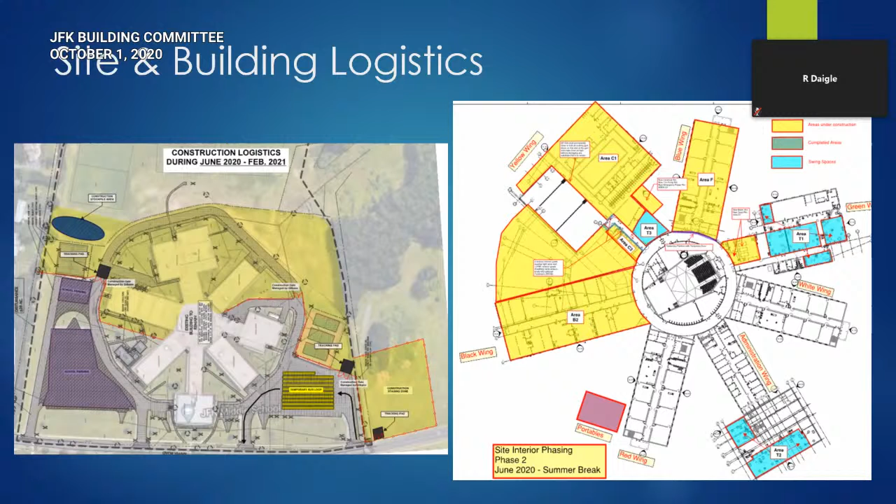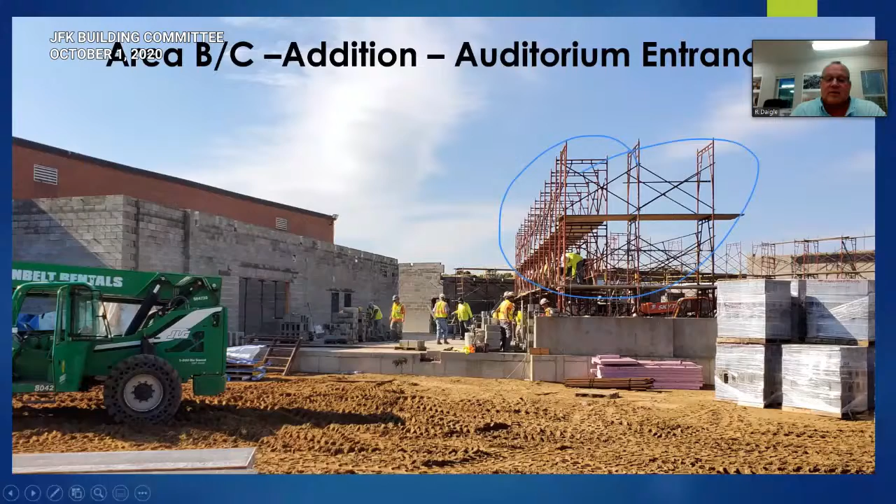Randy, you got to unmute. Or maybe Walter can hear. No, nobody can hear you. They're saying no sound. Now we can hear you. Talk now, see if we can. You hear me now? Yes, sir. Yeah, okay. Should be good.

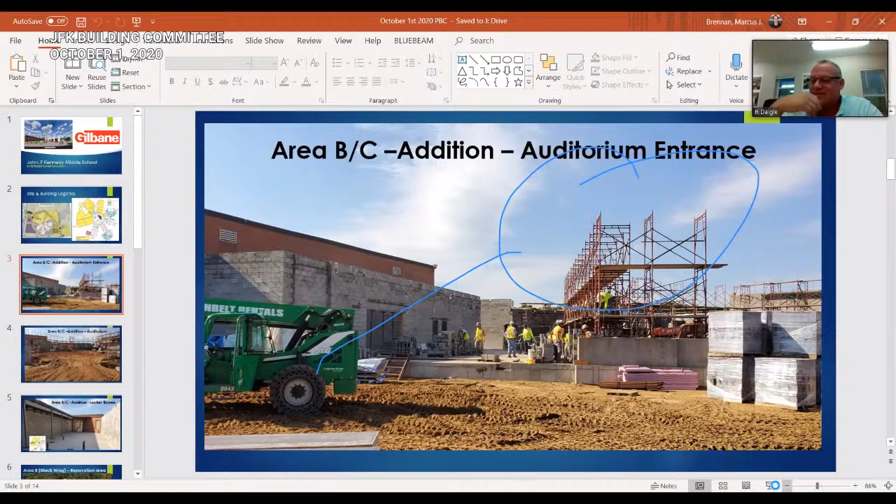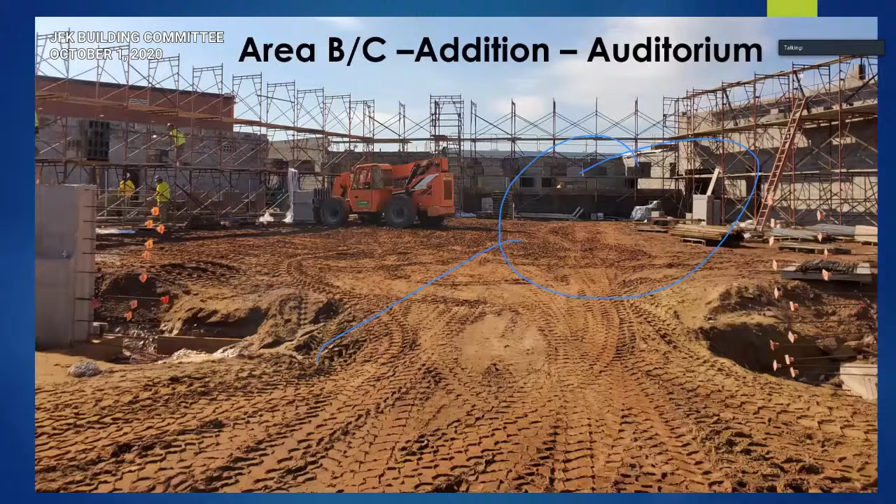All right, so the addition area between the gym and Black Wing. You're basically standing looking at the main entrance of that wing. There'll be a triple door assembly. The scaffold set up on the right is the outside wall of the auditorium to the corridor there, and to the left of that is a hallway to the gym and some small bathrooms. This is standing, if you will, just on the top side of where the seating will be in the auditorium, looking at the stage.

So obviously the masons are working in there now, with the intent to be scaffold high with the masonry and complete the masonry in that area within the next 2 weeks, so we can bring the crane on site and start erecting the addition.

One more shot of the addition area. This is what the locker rooms look like at the moment. The CMU walls are complete; they're awaiting the steel beams and the roofing. This is, I believe, the boys' room, and the girls' room is adjacent to it, same status. Both those will have ongoing steel work in the month of October.

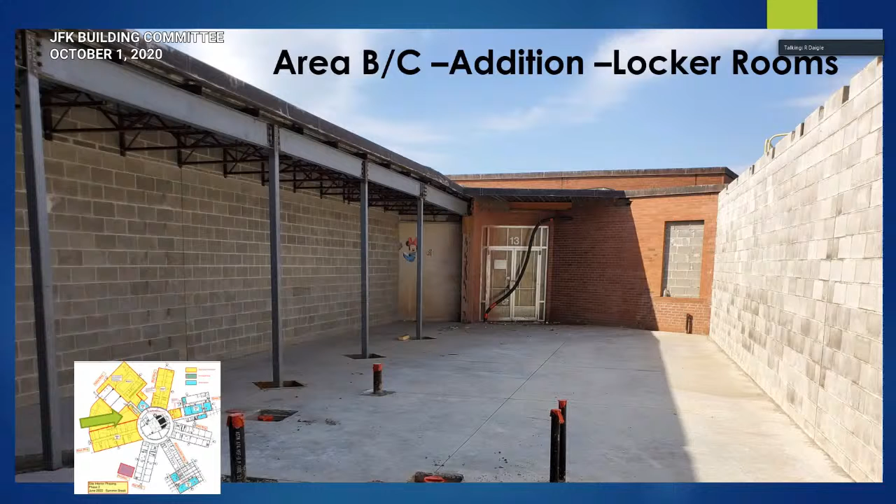Existing Black Wing, the upper picture, you can see the white. We re-roofed the entire wing at this point, cutting all the new roof drains. The lower right picture is a shot of the inside. We've been using the masonry demising walls in that area as rainy day work for the masonry crew as they complete the addition. A couple days that it rained, we built a couple walls in there. The overhead MEP roughing crews will be moving to this area next once they leave area F, which I'll show you in a moment.

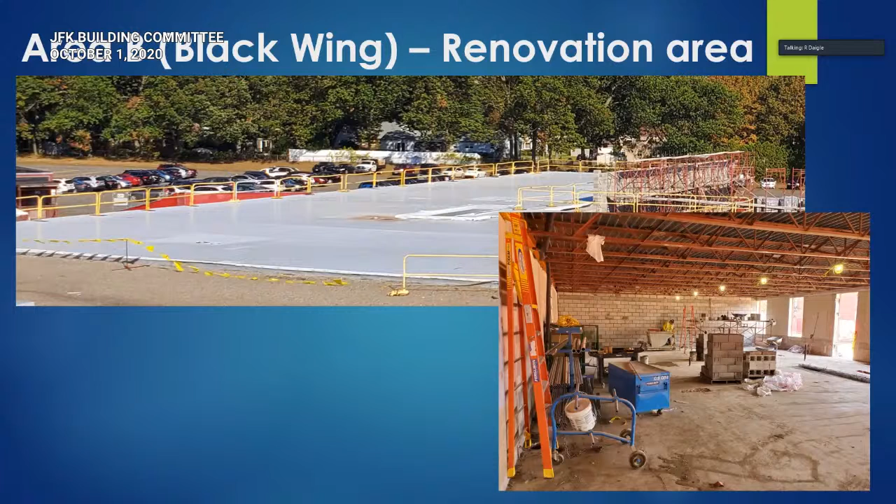So area C, your old yellow wing. The left picture is the future expanded caf and fitness area, the old girls' locker room. You can see the Stego and the mesh. We are prepping to place that slab by the end of this week.

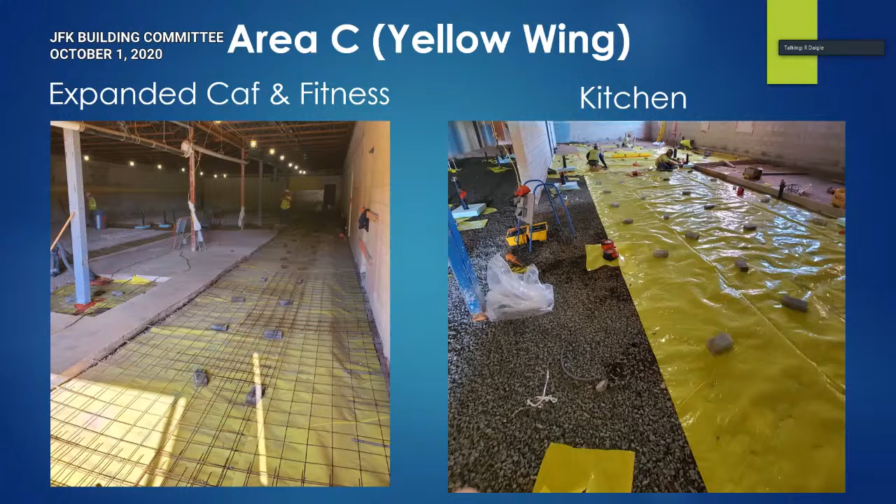Right picture is the future kitchen, which is the old boys' locker room. A very similar status, about a day behind. The intent is to pour that kitchen slab this Friday as well. So that's coming up quickly, as tomorrow is Friday.

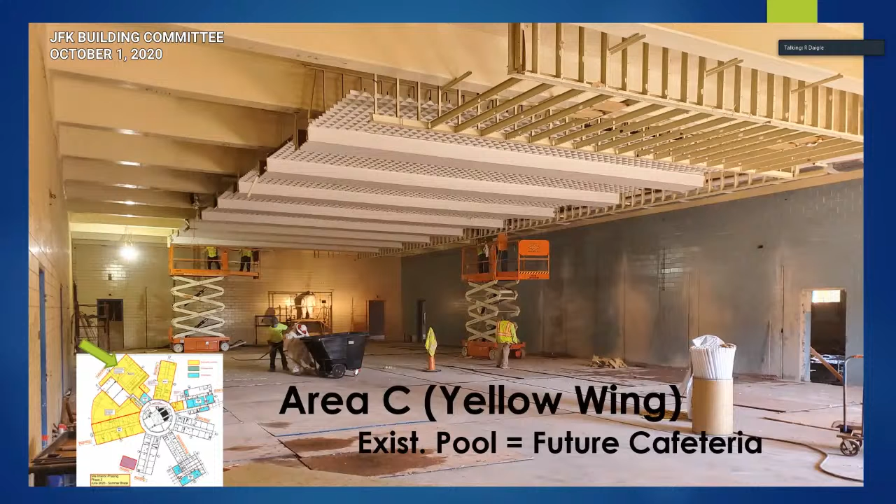Old pool, completely restored at this point, infilled, slab in place. We're demoing the old soffit that went over the top of the pool at this point. And then we'll be moving on to the roof and the MEP roughing in that area once that soffit comes down.

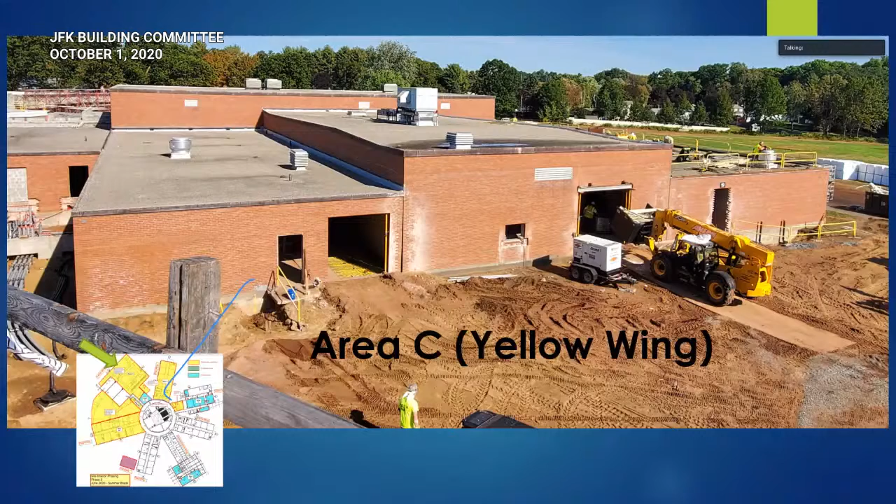A good shot of the outside, the 3 areas that we just talked about. If you look at the far right of the picture, you can see the roofing crew is actively working in that area now. The intent is to re-roof all 3 elevations of this area within the next couple weeks, as well as the area to the far left of this picture that ties in across the hall, or around the gym to the addition. So that by the end of November-ish, all the re-roofing for this phase, as well as the roofing on the additions, is substantially done.

The new switchgear room, this is a good shot of all the underground electrical work that goes in that area. This houses the switchgear, a good set of panels, as well as I'm actually standing in the future fire pump room, where you see the stub ups to the right, and the main water feed kind of in the middle of the room.

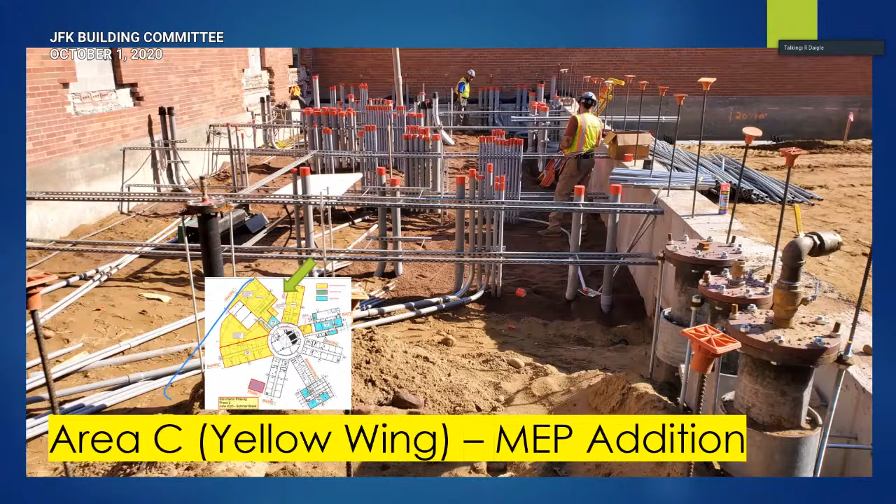So this area, we're pushing to place this slab on grade in about a week and a half, and then build this area masonry high. The trusses for the roof of this area are actually already on site waiting to go up.

Area F, which is the old blue wing, this is a shot of the roof. So completely re-roofed to this point. All the curbs you see in place are ductwork penetrations. If anybody recalls, all the ductwork for this wing is on the roof, and then it goes down in chases within each classroom. So there'll be a substantial amount of rooftop ductwork and a unit in the middle of this roof.

Some of that rooftop ductwork actually showed up to the site this week. So over the next month and a half or so, that ductwork will go in place, and the rooftop unit is tracking for the end of November for this wing.

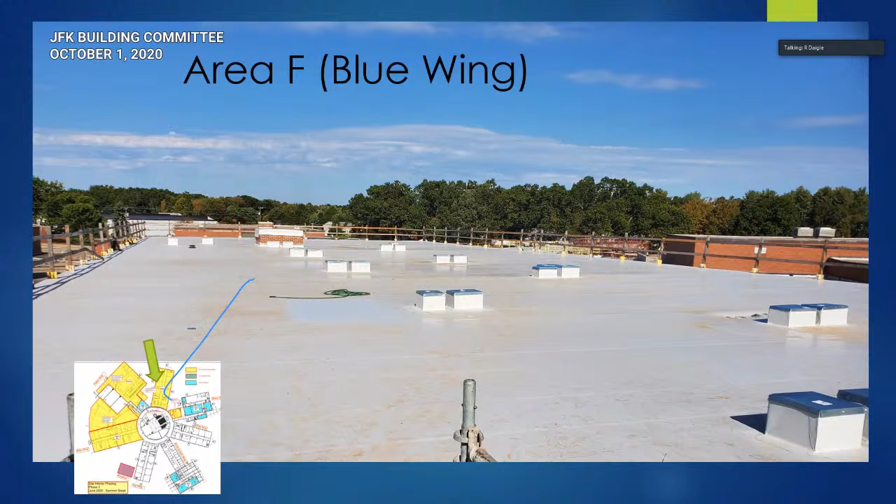And as a reminder, this is the wing, as I scroll to the inside pics, that we turn over first. This is the February turnover that allows us to take the next 2-story wing from February through the following summer. So this is 2 quick shots of the inside of that building.

The left picture, you can see the ductwork against the wall there. That comes down from the roof and travels right through down to the first floor, as well as - it's tough to tell in the picture, but there's a takeoff that'll feed the 2nd floor here, and obviously this riser goes down to the 1st floor.

Corridor, the 2nd floor, substantial amount of electrical work in place at this point. Sprinklers are substantially done, and overhead HVAC crews are working on starting their piping for both the radiant piping that goes to all the units at the walls for radiant heat, as well as the refrigerant piping for the split systems, which is the heating and AC units for the majority of the spaces.

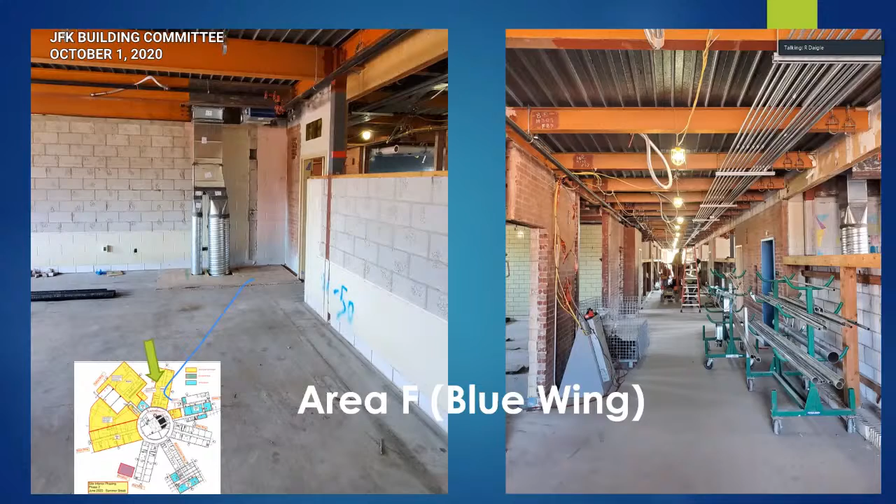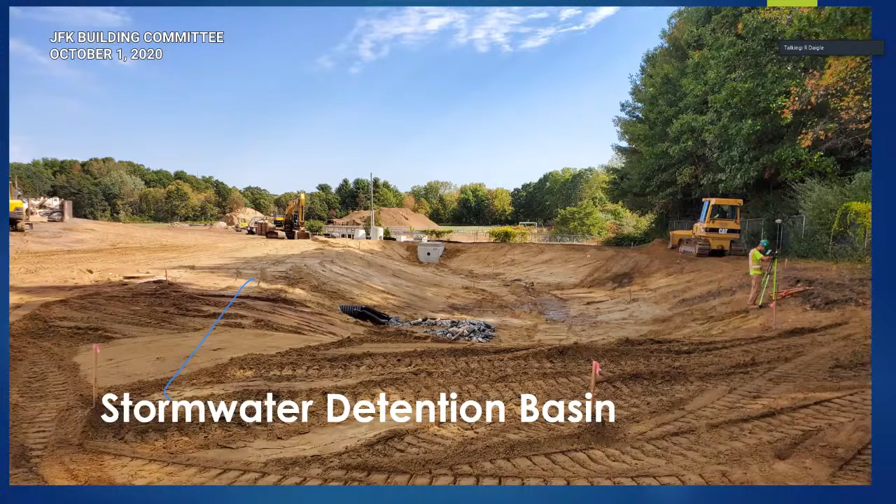One last picture of the outside. There's a new stormwater detention basin that we've developed to the southwest corner, if I have my direction right in my head, of the site. That's to rough grade at this point over the last couple of weeks, and filler work for the site work continues as we work through this fall season. So that's the last picture I have of it.

So overall progress is good. We're right on track where we want to be. Area F is a big push to maintain our phasing schedule. We'll keep going with that part.